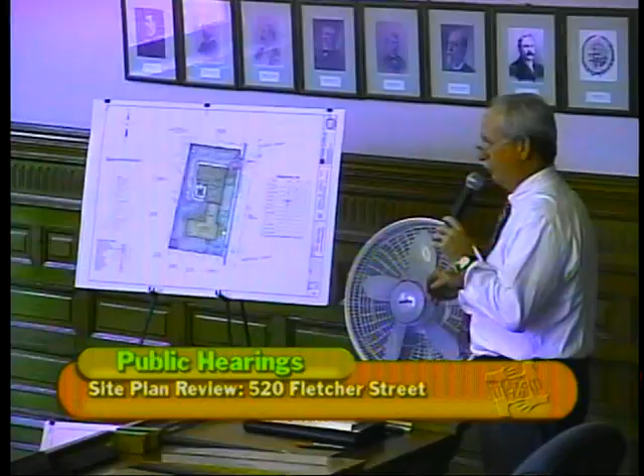Again, we've been through the pre-application hearing. I know you have a busy agenda. Maybe I could skip through the existing conditions on this particular piece of property, if that's okay, and go right to the proposed development. And then from there, what I'd like to do is go briefly over the building and then bring you up to date with respect to a meeting that was held on June 26th with the neighborhood, and go from there. Again, I think everybody's familiar with where the property is located on Fletcher Street, 520.

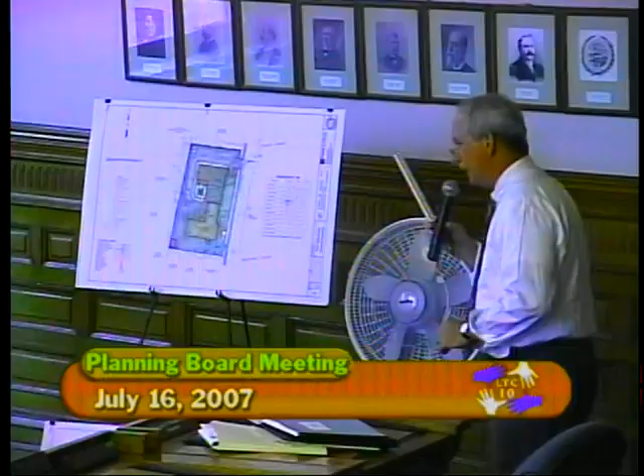There's an existing building on the property of approximately 7,000 square feet, a little more than that. What we're proposing to do is add an additional 20 beds to the existing 27 that are there now. This is a facility that's been in operation since the turn of the century. And as we stated in our application, there is a need out there with this aging population to provide these types of service, specifically in an urban environment and in neighborhoods like this.

What we've done is we've tried to match the mass and scale and texture of the existing building. It's a very unique building, it's a beautiful building. And what we'd like to do is complement that while we're not only responding to the need out there, but also responding to the need to make it fit into the neighborhood properly. What we've come up with basically is a mirror image of the existing building.

The existing building is an L shape. It was added on to some time ago from here back, but they did a nice job with that addition. There's an elevator that's on this end of the building, and what we did was we basically mirrored this, flipped it over. We added another elevator in here and added another entrance over here. When we spoke to you last, we were contemplating a revision to this end of the building with a handicap ramp, and it really did impinge on access back and forth.

So we decided to get rid of that idea, and we're going to put the handicap ramp in the back of the building over here, where we can easily accommodate access this way. So that gets rid of this whole issue with respect to access in here.

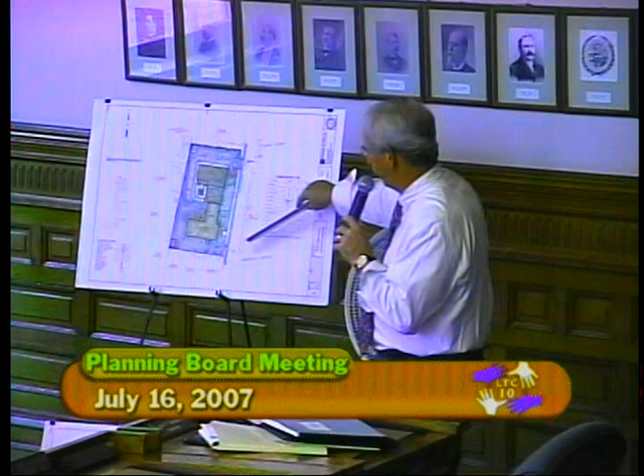Currently, there is one-way traffic in and out of the property, entering here, going around the building. And on the existing conditions plan, you'll be able to see that there's an exit right here. When we put the building on, we encroach into that existing parking lot, and we have to eat up some of that space. That necessitates moving the driveway to the north a little bit, but we can do it in a manner that complies with the zoning bylaws with respect to the number of parking spaces and the offset requirements.

Some of the features here, again, we come in here. We did have a bottleneck at this location with the existing garage, particularly for truck traffic coming and going to the site.

So we're proposing to diminish that, but there's another potential idea I'll bring up in a minute. We do want to do something to get rid of the traffic problem. There would be a small loading area here for someone to come in and unload the supplies needed on a daily basis for putting meals out.

Again, one-way traffic out, angled parking in here. Right now we're proposing the dumpster at this location. We're proposing a handicap parking space, which is also a van parking space, and can also double as an ambulatory pickup and drop-off.

Under the zoning bylaw chart, if you take a look at that quickly, you'll see that we meet all the criteria for zoning. Even though we're diminishing the number of parking spaces from what we have now, we have more parking than we need. And again, just to reiterate, the residents of this facility don't drive. None of them have cars.

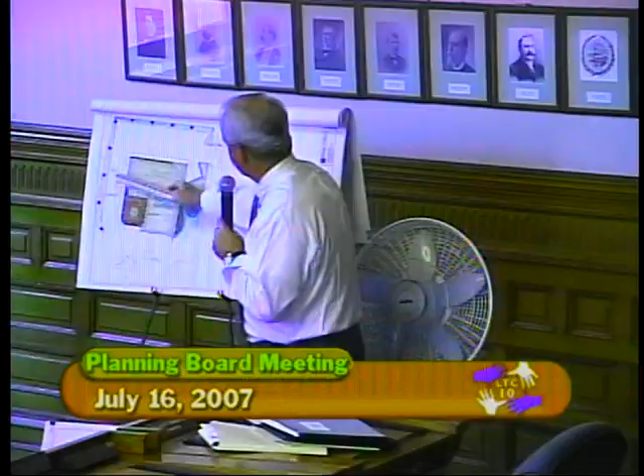As you can see, the setback of this building is consistent with the setback of the existing building, so we still will have a continuous front yard across here. We'll put some landscaping out front. We've got the garden area with flowers and shrubs with a stone wall and a fence. And you can see how this works, people getting in and out with the one-way traffic.

If I could, I'd like to speak briefly about the building.

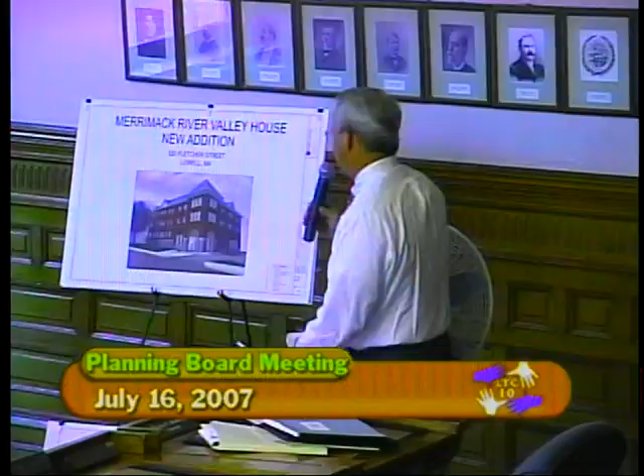This is a rendering similar to the one you saw before. What we attempted to do here is, again, try to match the mass, the size, and the texture of the existing building. We're proposing to continue a water table up here of a stone or stone-like material, which takes the height off of this a little bit scale-wise. And we're making a prominent tower feature right at this location. There's a grade change that we have to accommodate, which this helps to take care of.

As you come into the building, you'll be at one level, then you'll be able to go like a half a level up to the next. The corridors connect all at the same level, so there's no need for anyone to change elevators to get from one level to the other than where the elevators are existing at this end of the building and proposed at this end of the building.

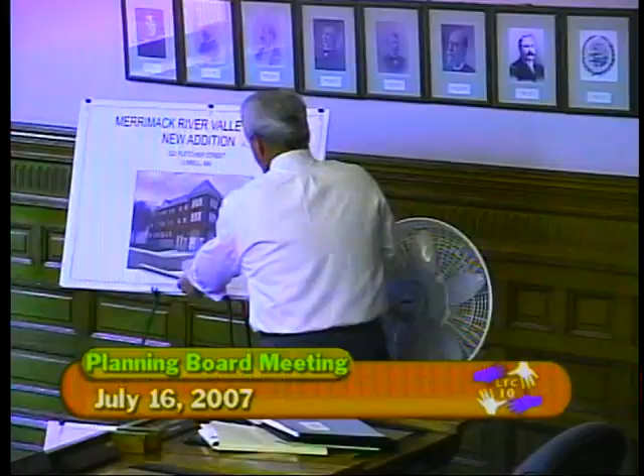The first floor down here will have community room, offices, recreation space, and whatnot. And the floors up above will have the nurses' stations and the rooms. I don't know how much you want me to get into the floor plan of the building, but I think that's been submitted for review in case you want to take a look at that.

This is the corner right here. You come into a lobby, restrooms. Here's a community room that opens up to an outdoor patio with a sunroom over here. And here's the garden area that we talked about. We propose a new elevator right in here that allows you to get from that lobby area up to these elevations and subsequently up to the next floors. The corridor connections are straight through.

The design criteria we had to meet is design criteria put out by the Department of Public Health. We've got a simultaneous and parallel approval process that we have to go through. They're very stringent - one of the criteria they have before we can take it to the next step is that we have to have local planning board approval before we can file our application with them to go to the next step for their approval.

And these are just the rooms above. I think the thing we want to point out is that this new section will have the ability to accommodate male and female residents. So, for example, if we've got an elderly married couple that want to stay together, that will now be something that they can do.

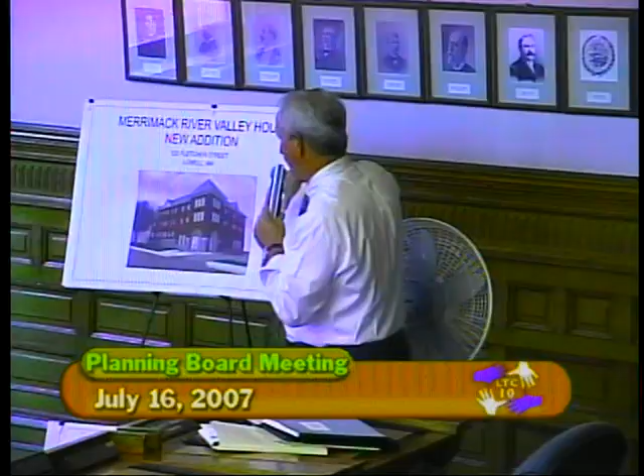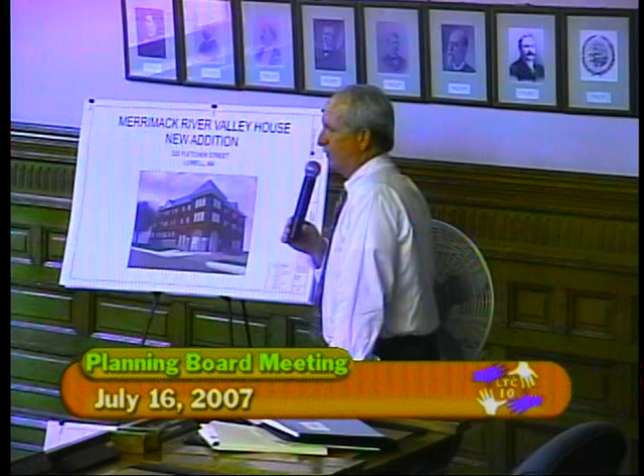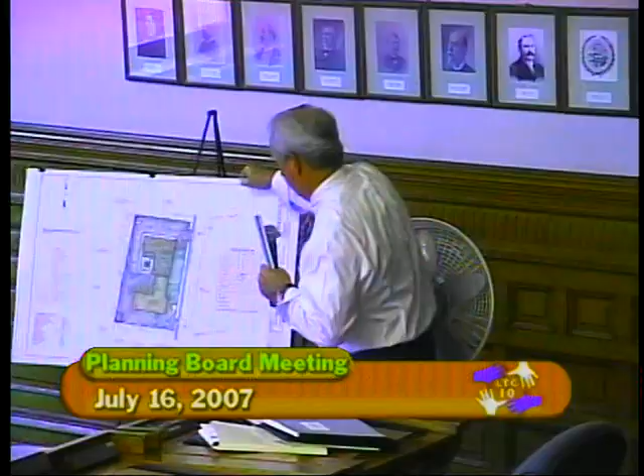Currently, the dumpster is located right here. The neighbors suggested that we relocate it to this location, which I believe we don't have any issues with. We'd have to work that detail out because we still want a place to put outside yard equipment, mowers and things of that nature. So this might end up, rather than just modifying this garage, just getting rid of it. We're not sure yet, but it's not a bad little building, and we'd like to keep some of it if we could. The next thing the neighbors brought up that they wanted us to bring to your attention is the lighting.

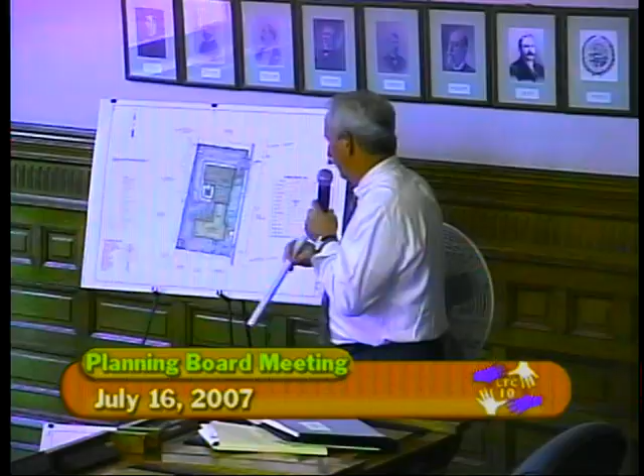Right now, the lights are not cut-off lights. They have a tendency to disperse the light all over the place. So what we could do is keep the poles and change the lamps to full cut-off lamps that would just get the light to shine downward. Those are really the only two substantive things that came out that we're proposing tonight. They may bring up other issues that may or may not relate specifically to this site, but those are the two we think we can work on and accomplish.

Other than that, Mr. Chairman, that's all I have right now. Thank you, Mr. Foley. Mr. Foley, does anybody else on behalf of the applicant want to speak before I turn it over to the public?

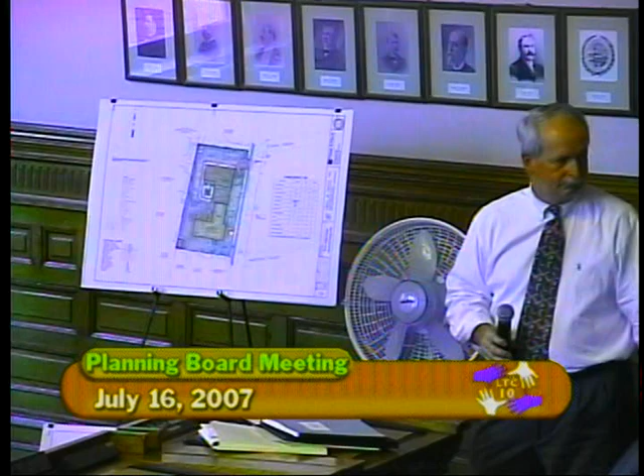No? Okay. Hearing that at this point in time, anybody here like to speak in favor of this proposal? Anyone here in favor? In favor? Hearing none, that portion of the public hearing is closed. Anybody like to speak in opposition?

Good evening. My name's Susan Hardy. I live on Mount Washington Street. I don't not disagree with the expansion. I do have concerns about parking and green space. All I see around that whole building on the back and sides is nothing but parking, tar. There's only a little bit of green in the front. I don't understand how some days you have 15 cars parked there. You're doubling your occupancy. That only leaves 7 people that may be able to come and visit. Our neighborhood cannot take that overflow. We just can't afford it.

Thank you. Thank you. Anybody else like to speak in opposition? Anybody else in opposition? I was handed a letter from one of the neighbors. I will just read this letter into the record.

Dated July 16th, 2007, to Lowell Planning Board, Mr. Thomas Linehan, Chairman. We, Robert and Judith Garthia of 33 Mount Washington Street, Lowell, have some concerns and reservations with the proposed expansion of the River Valley House at 520 Fletcher Street, Lowell. While they have always been good neighbors and maintained their property well, this nearly doubles the size of the facility, which causes us some concern. One, it is one of the few properties in this area with any noticeable green space. Because of this expansion, the green space will disappear. Two, there is currently sufficient off-street parking on their site. However, with this expansion, they will have more employees, more residents, more visitors, and less parking. Fletcher Street, as you know, is a major artery, and on-street parking would be a major inconvenience. It is also a hazard for all traffic. The side streets in this area are already overcrowded with parked cars and are ill-equipped to handle any additional cars.

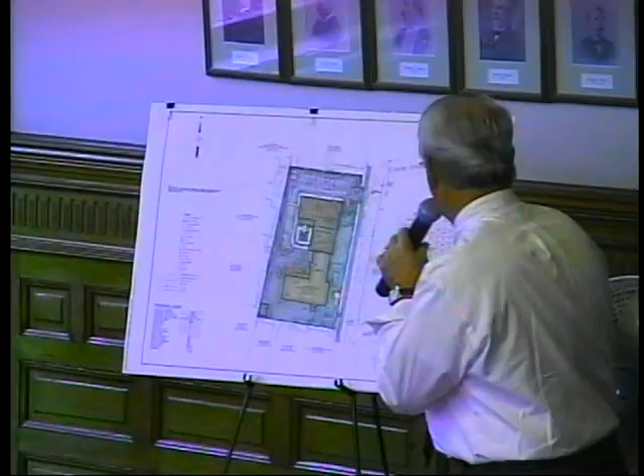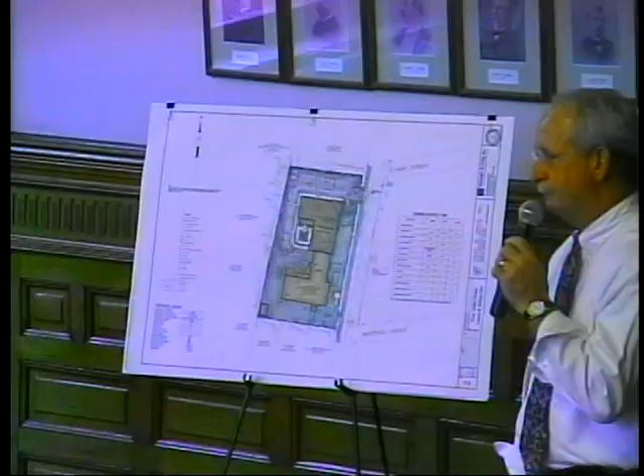Right. No, actually, we didn't have 28 before. Existing is now. Before we added this on, all we had was the parking back here, so we had 1, 2, 3, 4, 5, 6, 7, 8. And maybe, I think they were parking a couple cars over here. So I think before they put this parking lot over here, they had something like 12 parking spots. And it seemed to be working for them, and it's just that they had this piece of land over here, and if I'm not mistaken, they got some grant money to expand that, so they did. Okay, I would just encourage you, there's never enough, you know that, to try to maximize your plan in terms of parking.

That's all I have, Mr. Chairman. Thank you. Mr. Gentleman, you have any questions, concerns? Thank you, Mr. Chairman. So I just had one question with regard to the parking, and George, maybe you can answer this for me. What section of the parking table governs a facility like this, what's the zoning requirement? George, over there? I think we did this under institutional use, per bed, I believe. So many spaces per bed for a hospital-type institutional use, if I'm not mistaken. 1 space per 3 beds plus 1 space per emergency care bed.

So it does concern me, as Mr. Lockhart pointed out, as much as you say you're the only one in the lot - where do the employees park if you're the only one there? Actually, the employees park back here. Well, you said there could be 15 employees. I haven't been there to observe them and if they all have cars or not. So do you have 12 to 15 employees now? Yeah, maybe Mr. Hardy can respond to that better than I can.

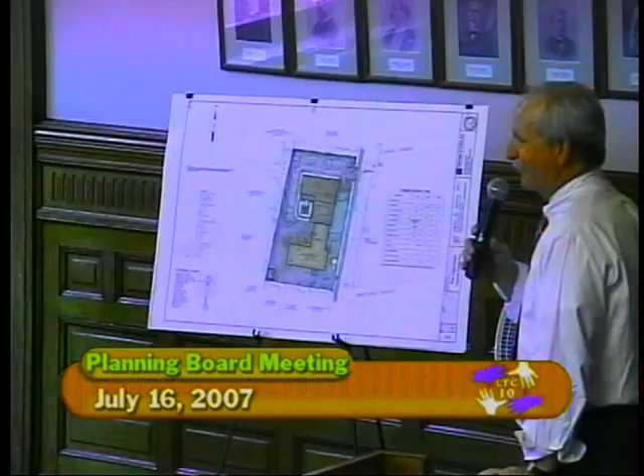Every time we've tried to put these in an area that was aesthetically pleasing, they've trumped that effort. It's just one of those things that bring life and safety into the situation. And it's funny, if you don't look for them, you don't see them. But they're just pretty prominent in most projects.

So you're going to address the dumpster location and the lighting. I think that's the pleasure of the board, we can do that. I think we should make that a condition.

The other question I had is, who does River Valley House support? Is there anybody who applies, can access it, or does it support a specific population? What is the community that it supports in the area, the type of people that go reside there?

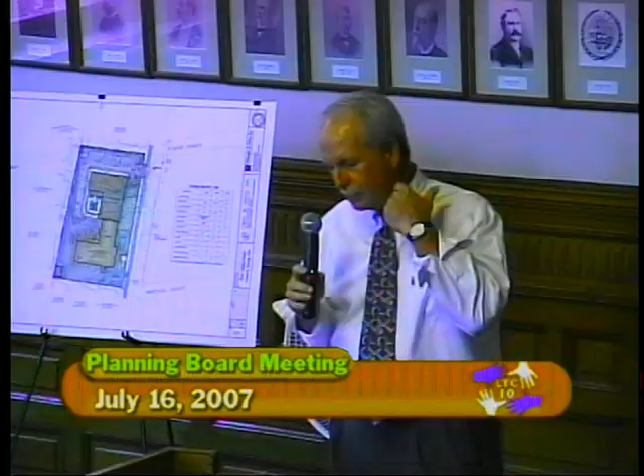Thank you. My name is Harvey Boulay. I'm a consultant to River Valley House. Our average resident age right now on admission is 85 years old. These are people, more than half of whom come either from the city of Lowell itself or lived much of their life in the city of Lowell and are moving back in to join the residential care facility. We provide 24-hour care that provides care for activities of daily living.

These are people who can't live independently and whose families can no longer give them the level of support they require to remain healthy and have a good quality of life. It's not a nursing home. We provide limited health care. We provide housing, meals, health care monitoring, and personal care. And so it occupies an important niche, we think, between independent or assisted living, where you have limited assistance, and nursing home care.

What River Valley House importantly does is help keep people out of nursing homes. One of the main problems in caring for this rapidly aging, increasing population is that many people end up inappropriately in nursing homes because they can't find this nice level of care that provides a modicum of assistance that they need, where they don't need round-the-clock medical intervention or services.

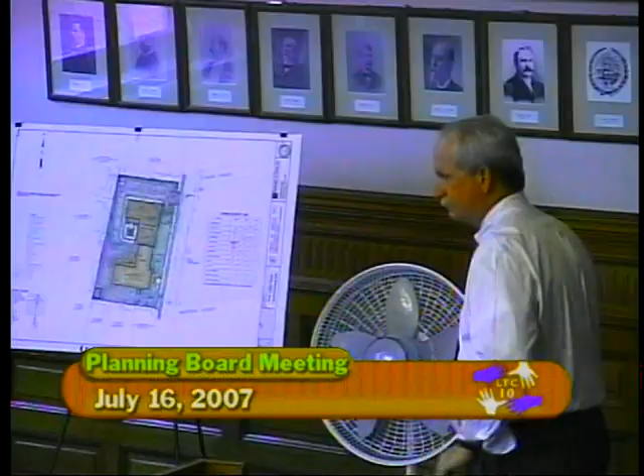First of all, I'd like to compliment the petitioners and Mr. Foley, because I had some issues with the original configuration at the pre-application with the handicap entrance, and I was pleased to hear that you saw that as a concern and moved it to the rear of the building. I think by doing that, we addressed the issues with the parking. I know I was involved with an organization some time ago that did volunteer work there, and we were able to actually park cars along the side in front of that garage, so I think there's an opportunity to get some spots there.

I have to ask the question regarding that box in the front of the building. From your experience, what do you think we could get away with for screening on that?

I think we can perhaps put some shrubs around the side and back, but not in the front. Yeah, they won't permit that. Actually, it doesn't show on this drawing, but if we put it right here, we could show shrubs around the side and the back. How many feet is that from the sidewalk as well?

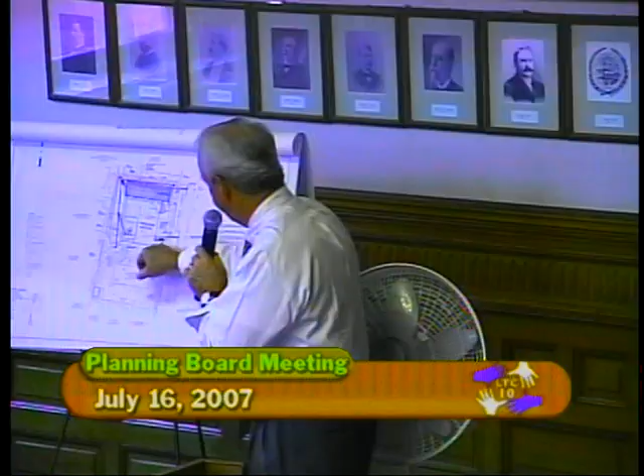That's close, approximately 15 feet from the sidewalk. And that's going to be approximately 5 feet high? Yeah, they have different types. They kind of dictate to us which ones they prefer, given the loads that are going to be used, the capacity.

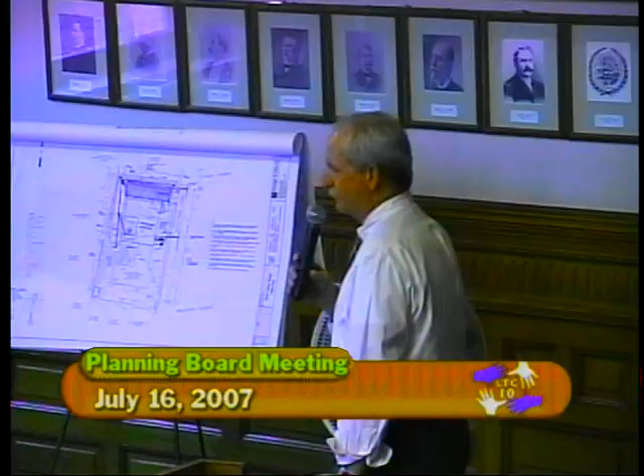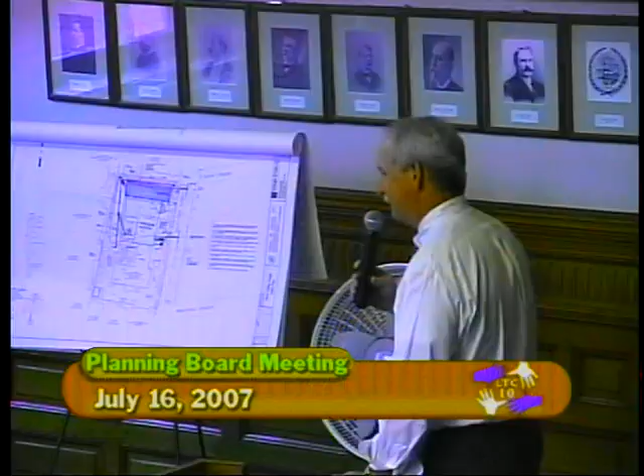We certainly would want to try to maximize the screening around that because it is so prominent in front of that building. If you go by Lowell Catholic, it's right there in the front. You go by the thing Nick Saris did down here, the senior center down there at CVS, it's right there in the front. We've tried it numerous times, but it's tough to get that waived.

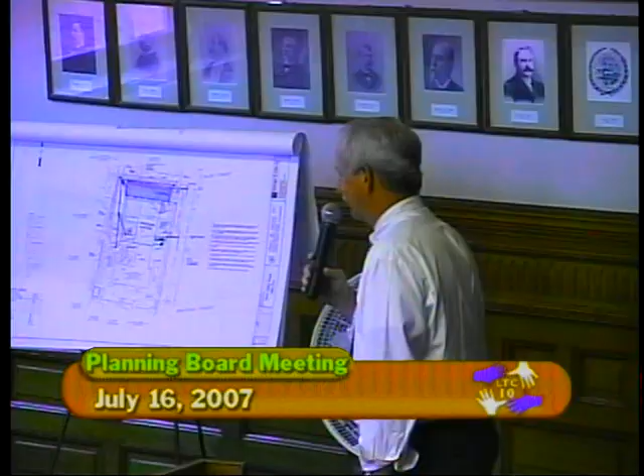Well, I'm certainly pleased with the architectural details and the care that you're taking with the addition, in meeting with the neighborhood around there.

The dumpster, I guess, is my concern. I actually went through that site yesterday, and that's tight with the existing garage, making that turn. What you're proposing to chop off, or trying to, how much room is that going to give you? I'm just trying to visualize a dumpster, storage, and maybe some additional parking. I'm trying to get a feel for what that corner could look like.

What we try to do is take off enough so that an emergency vehicle can get through, which is like a centerline radius of 32 feet.

Again, if we put the dumpster over there, there's a pretty good chance that this is going to be diminished so much in size that it's not worth keeping, and we'd be better off just getting a nice shed to put out there next to the dumpster for the lawnmower and stuff. If we're doing that, depending on size, we need 10 by 10 for the dumpster pad, so that'll eat up some space, and the shed doesn't necessarily have to go at this location. We could probably find another spot for that.

There's a chance that even some of that use, because now we've got some space to work with in the back here, currently occupied by... did you see the ramp that was out there? Yes, now I did, the handicap access ramp. That ramp's coming out. And that's going to create, that eats up a lot of square footage.

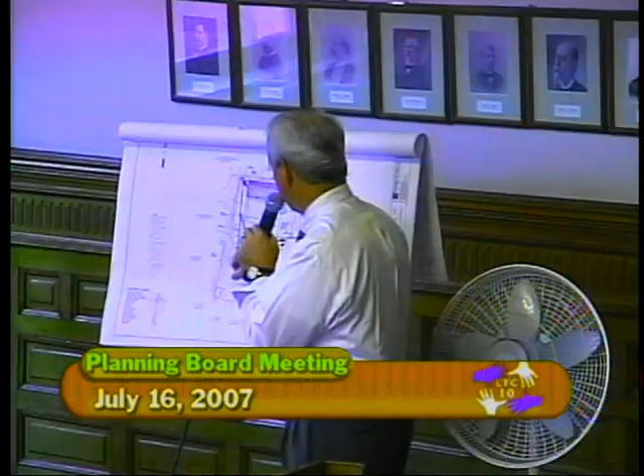So we might be able to do a couple of things here. We might be able to put a shed and grab a couple of parking spots at the same time. And again, it's out of sight, tucked around the corner, so you wouldn't be able to see it from the street.

Okay, Mr. Chairman, that's all. Thank you, Jerry.

Joe, any questions, concerns? Yeah, thank you, Mr. Chairman. I like the project. I applaud you for meeting with the neighbors as well and addressing their concerns. It certainly does provide a necessary service. Just have a question following up on some of what my colleague spoke of concerning the parking.

I understand you have an arrangement with the church for whenever there's a large function where you need additional parking. Are you comfortable enough with that arrangement that if, as a condition of approval, we said there'd be no overflow parking for employees or visitors onto the street, would you be comfortable with that?

Yes. I might say that we have a splendid relationship with the church. In the event of emergency, we have a key to the church where we could transfer our residents to that location. So you can see there's a good relationship there.

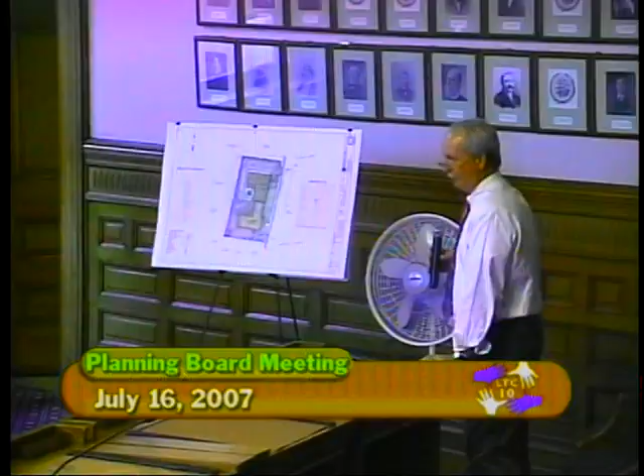I believe that's all I have, Mr. Chairman. Thank you. Thank you. I just have a couple of comments.

As indicated when we came in at the preliminary plan, I do like the building, I think it's a beautiful building. When it came in the first time, to get some feedback from the board, our concerns at that point were your turning radius and the parking.

Looking at your parking arrangements, especially having the parking across the street, I feel that could definitely take away any impact the parking may have. You've indicated you have 20 spaces and a total of 17 employees, 10 people during the day with 2 shifts, so approximately 5 employees per shift, and 7 at night. So even if you increase that with the new proposal and pick up, say, 2 more employees during the day, and if they all brought a car, that would be a total of 7, so that would still leave you 13 additional spaces, as well as the parking across the street from the church.

Under the zoning, I know you meet the required 20 spaces required by code, but I do like the fact, as indicated by the board members, that if you can pick up any additional parking, we always like that. I think, as Jerry brought out, if you could put the shed in the back there and pick up the extra parking there, I think that'd be a good place for employee parking.

Another suggestion would be, if you have to utilize the church parking, it might be a good idea to put the employee parking over there, since they're more mobile and probably not 85 years of age like the residents you're caring for. So if some employees could park over there, that would make it a lot easier and leave a lot more parking for the people who visit the site.

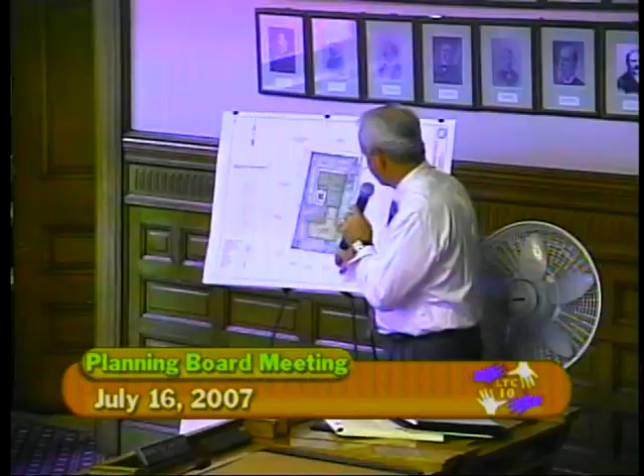We're proposing the new ramp here, and there'll be deliveries coming to and from here. The reason this works well is we can get those front end loaders to come in, pick it up, dump it, and go, instead of trying to turn around the back and process through some of the parking area. But that's the only comments I have.

Thank you. Any further comments with the board? If not, we'll entertain a motion. Chairman, I had one more question—would it be possible to formalize the relationship with the church?

We've done that before, where an applicant wanted to use a neighbor's parking lot, and as part of their application submitted a letter from that organization saying River Valley House has the right to use their parking lot in the event of overflow parking. Can you provide something like that as part of the documentation of this application?

I think what he's requesting is if we could get a letter from the church saying yes, that you have an arrangement with them to give adequate parking in case of overflow. If you have that arrangement, if we could just ask for it, we'll get it back to our file so we know that accessibility is there. Obviously, if they're willing to take your tenants, it'd be nice to see them take your parking as well in case of an emergency.

You have no problem with that? Okay, thank you. Anything else, Mr. Chairman? Any other questions by the board members? I have none. Okay, hearing none, what's the pleasure of the board?

Mr. Chairman, I'll make a motion that we approve this site plan with conditions. The conditions I'll recommend are that the applicant receive fire department approval for the plan, that they modify the lamps to downward-directing lamps, move the dumpster as suggested this evening, provide that there be no overflow parking for either employees or visitors off the site, and document the parking agreement with the church across the street.

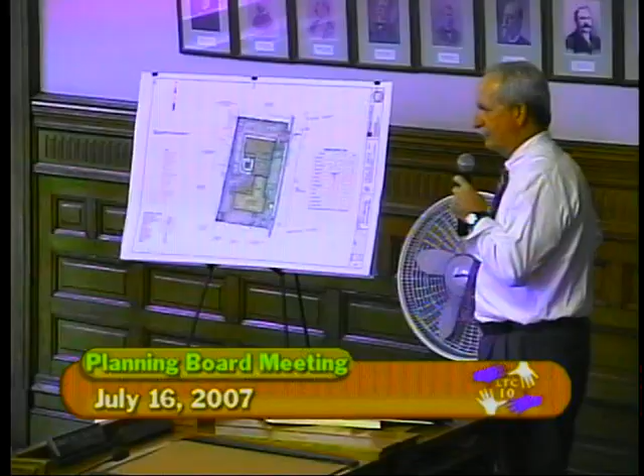You want to add that as one of the conditions? Sure. Yeah, if there's any way we can modify that to meet their requirements that's less obtrusive, you can only do what they let you, so. That's true. Yeah, that's right.

So that covers the screening. George, what was the other one? It was the traffic engineer's request about the way the lines are done in the handicap spaces, and particularly, the engineering office and site plan review would prefer having a condition that inspections would be done, so it's clear to the developers that before the project is built or covered up, they do need to call the engineering office to inspect things.

That was one of the recommendations by the engineer's office. The engineering department did submit that as a recommendation. Do you want to add that? Yeah, I think he indicated they were doing that, but we can add that as a condition, that's fine. Approval for the city engineer request?

Okay, any further discussion? Hearing none, okay. There's been a motion made and seconded with several conditions. All in favor, say aye. Aye. Chair votes yes. This motion carries, 5 in favor, none against. Good luck, thank you very much. Thank you much for your time.

While he's taking down his picture from the design site, just to let you know that the next matter we have on the agenda will be the 612 Dutton Street, Weston Ave, and Fletcher Street.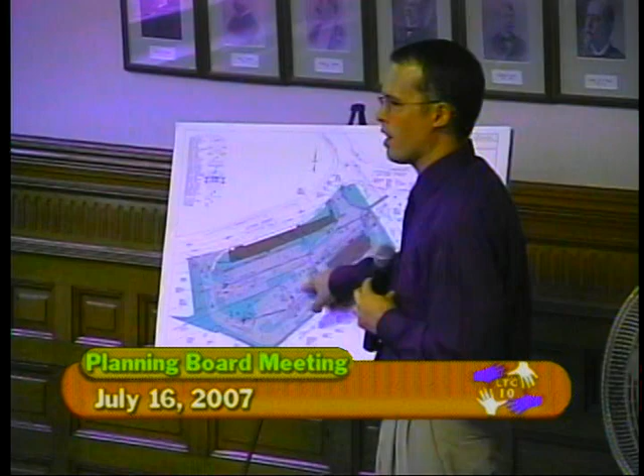Originally this back parking area was closed off. We opened it up and are proposing to put a bar gate and lock across here. This is a better way to bring in the dump truck—when it's coming, you unlock the gate, the dump truck comes in, swings open the gate, pulls in, locks it, pulls straight up to the dumpster, backs up, and comes back out, rather than trying to do some funky turning maneuver to reach the dumpster.

We've also had conversations with Mass Electric about the existing utilities, particularly the electrical lines. We were made aware that we should work around this existing pole in this area, which Mass Electric really does not want altered or touched.

So we shifted the parking a bit to the east, slid it up toward the front of the building, and realigned the exit of the drive-through. The drive-through originally came through at more of an angle; we brought it more parallel and then into an angle coming out, so that we could accommodate Mass Electric and the existing utilities out there.

The utilities proposed for the site—there's existing water, sewer, and drainage that runs directly through the property, so a lot of them will have to be altered as part of the project. One reason is we're altering and paving on top of it, and two, the building is directly placed on top of the existing water and sewer lines.

The existing sewer line in this portion will be abandoned. A new manhole will be added here so we can connect right into the existing sewer line. When this manhole is added, they can pump around to maintain the actual sewer flow while they construct a new line, which will run from the new manhole to the existing manhole within the right-of-way of Fletcher Street.

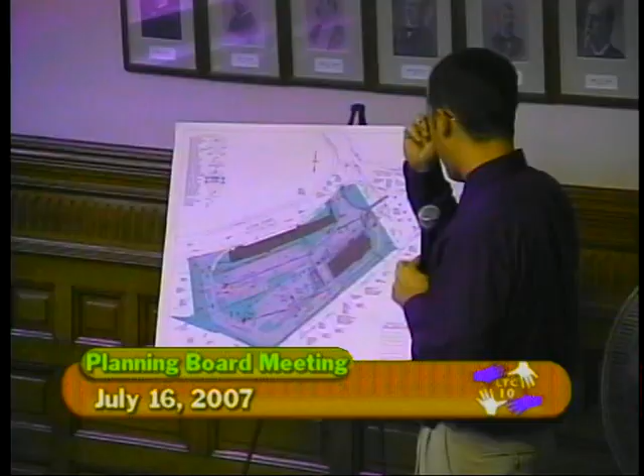The second point is about providing pedestrian access to the site. There are several existing sidewalks that run along the site, and we are providing 3 or 4 different connections to the existing sidewalks. We're proposing a new sidewalk here, which will connect into the existing sidewalk along Dutton Street that runs into the front of the building.

Again, that existing sidewalk will also have connections at the front entrance here, as well as we're proposing to build a new sidewalk from the corner where the drive-through, the speed bump, and the crosswalk are, out to Fletcher Street, so that anybody coming from this way on Fletcher Street can cut through and come into the site and into the Dunkin' Donuts rather than coming out and around and having to worry about the drive-through traffic.

They can cut across where the stop signs, the speed bump, and the crosswalk are, and this sidewalk can be maintained and kept clear during the wintertime and during any other inclement weather by the applicant and the owner of the property.

Comment number 3 is the board may wish to consider the traffic engineer's comments specifically regarding upgrades to the loop detector and the pavement for Thorndike Street's inbound left turn lane green arrow. A relatively minor upgrade will improve traffic flow at this intersection along Thorndike Street, providing easier access to the Dunkin' Donuts site. Again, I have spoken with the applicant, and he has agreed to work with the city on improving that loop detector so that it is functioning properly.

Number 4, the board may wish to consider the city engineer's comments, which include the need for easements associated with the relocated sewer and water mains. Further, Dutton Ave, which provides access to the southern portion of the site, is still a public street and should be kept to city standards.

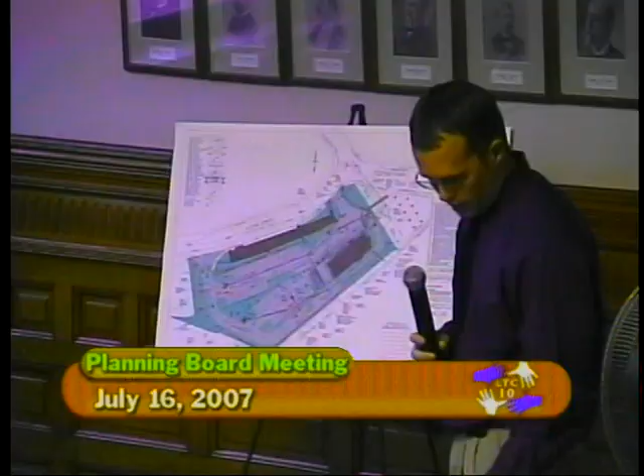The second comment is that Dutton Ave, which is still a public street, should be kept to city standards. This is the short section of what's left of Dutton Ave - I understand it's still the shortest street in the city.

The applicant has agreed to leave what's in the city layout the way it currently is, but we believe that adjusting and narrowing the entrance can provide better traffic flow in and out of the site and improve safety. You're narrowing it down to 24 feet, which is 2 lanes, rather than almost 40 feet wide, which it currently is. With the traffic flow you'll be having with the Dunkin' Donuts there rather than the car wash, it helps to redefine and narrow your traffic patterns, especially at the ins and outs where you'll be having truck traffic.

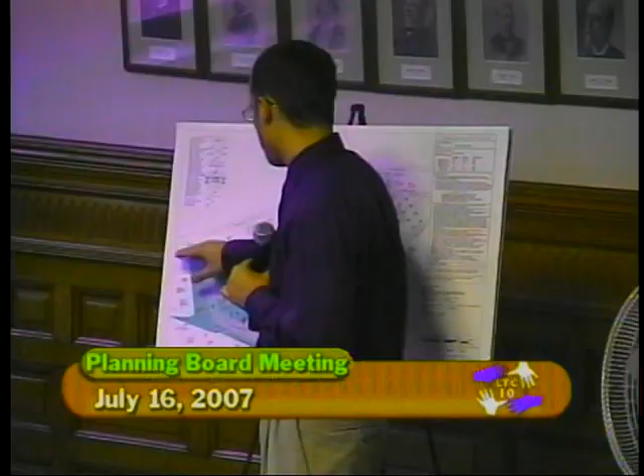It's also my understanding that the owner of the adjacent property has a fenced gate that he uses to access his property. If this is left as proposed on the plan, we can provide an entrance off of here for his use only so he can still access the gate. But if it is the board's desire to keep Dutton Ave the way it is, the applicant is willing to work around that and modify the entrance so it works with the existing conditions on site.

Comment number 5: the city's health department and wastewater department are curious how the grease from the bakery will be disposed of from the site. They urge the applicant to work with the health department on designing the requirements for the grease trap, as well as how you're going to remove the grease and anything else from the site. We have spoken with the health department and agreed to work with them during construction to make sure it's designed and constructed to their needs. As I mentioned earlier, it's not a large flow coming into the grease trap.

It's only something that needs to be emptied 2 to 3 times a year. It's not a large kitchen area that you'd have to empty once a week or a couple times a month - it's relatively small.

Comment number 6: the plans note the removal of old railroad tracks from the parking area. DPD is wondering if the applicant has proper permission, and they urge additional research to ensure compliance with all processes during construction. Mr. Eliade spoke on that earlier and provided the board with written information regarding permission for the removal of the railroad tracks, except for the portion that still remains within Dutton Ave.

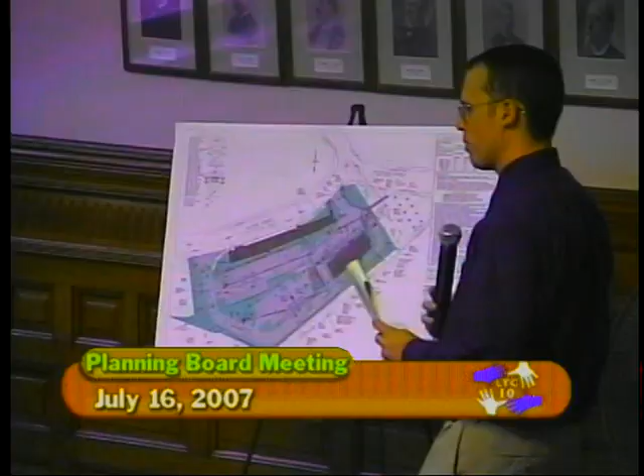The next set of comments is from the transportation engineer. First, curb ramps shall have detectable warnings according to ADA standards. That note has been added in the revised plans. It's simply a pad with raised bumps generally added at the end of the ramp prior to the crosswalk, so that it's detectable by someone with a cane, or you can feel it with the bottom of your foot.

The second comment was about upgrading the loop signal at the intersection, which we went over previously. Conservation has noted that the project is on the agenda for July 18th.

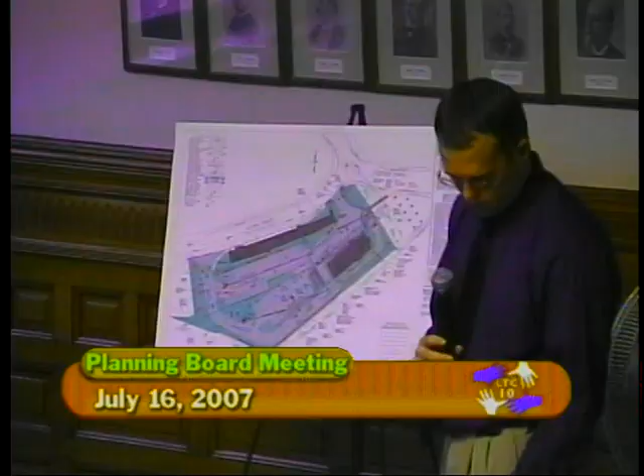Comments from the engineering department: his first comment is on sheet 2 of 5. The new drainage plan shows a pipe entering the canal wall. Permission is needed to enter the canal wall first, or this plan is no good.

As I mentioned earlier, the drainage has been revised. Originally, the line came out and punched through the canal wall. We have since done additional topo and located the existing walls in this area. There's a break in the existing retaining wall along the canal, which part of the site currently drains out through and directly into the canal. That's what we're going to utilize for the outfall.

We'll have a single outfall with a flared end and a riprap section that will help slow down the velocity of the water prior to entering the canal. As I mentioned, this still needs approval from the Conservation Commission prior to construction.

Second comment is about the sewer easements, which we went over earlier, and that these easements must be located by a surveyor and recorded by plan, which is something that will be done after approval.

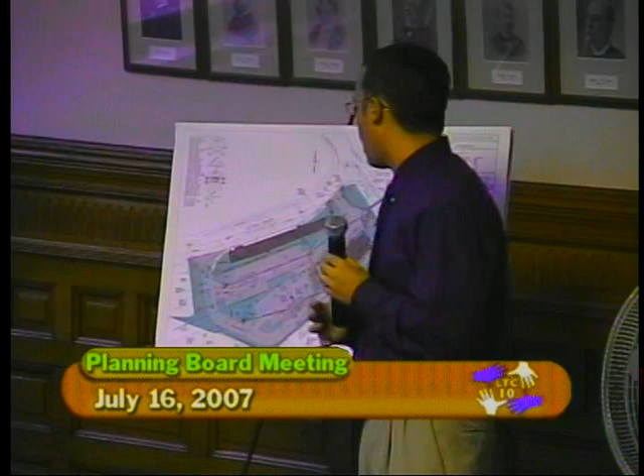Third comment is about Dutton Street, which should remain to city standards in the way that it currently exists. We went over that previously.

Last comment is about the labeling of Western Ave. Originally, the labeling of Western Ave was up in this area. The old Western Ave actually runs straight through here. That label has been corrected and added into that area.

As I mentioned, we spoke with the water department, and we do have an appointment to meet with them tomorrow regarding the construction of the water main, how they want it constructed, what time of year they want it constructed, what monitoring they want, and they also requested that we do some fire flow tests for the fire protection design, which will be required prior to doing the design.

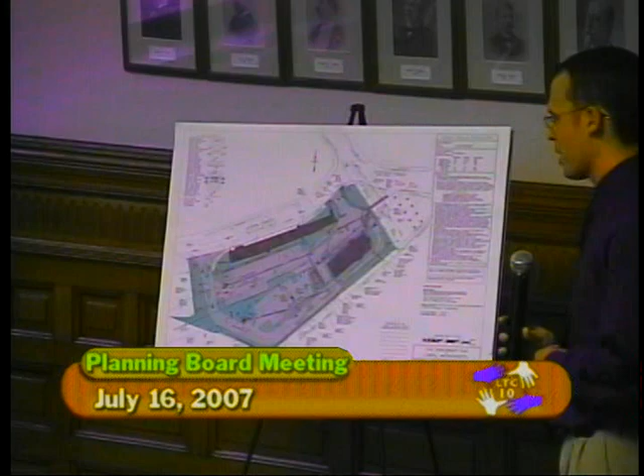There were no comments from wastewater, Board of Health, or any other comments that we received. That is pretty much the basis of the project and where we stand at this point, including comments received by the town. If there are any questions at this point, I'll try to answer them to the best of my ability, and Mr. Eliades and Mr. Marino here as well.

Thank you very much, sir. You're very thorough with the department comments, I appreciate that. Very good. Because usually we bring them up, but by hitting them first, it limits our questions to some of those issues. Thank you. Mr. Eliades, anybody else want to speak on behalf of the applicant before I turn it over to the public? No? Okay, at this point in time I'll turn the matter over to the public.

Anybody here like to speak in favor of this proposal? In favor? Just come to the microphone and state your name and address, please.

My name is Bob McKittrick. I represent my business, McKittrick Industrial Supply at 60 Fletcher Street. Over the past 10 years or so, we've watched the Acre neighborhood improve, starting with the Market Basket, new Stoklosa School, and the renovations through the Adams Street, Suffolk Street area. I think this project is a great asset to the neighborhood. I think we're all looking as property owners to see the neighborhood continue improving. Obviously, some of us have businesses that have finite lives, and we're looking for exit plans for our businesses, and this will do nothing but enhance the values of the neighborhood. I think it's a gateway to the city, especially as you come down the curve on Thorndike Street, it presents a great vista for people coming into the city. I think it's one of the last areas that hasn't been developed, and I think it's just a great project, and I endorse it completely. Thank you.

Anybody else like to speak in favor?

Hi, Don Kelly from Ed Kelly Sheet Metal on Fletcher Street. It appears to me that these gentlemen are very sensitive to the area with this plan. I think it's great. I think it's a plus for the Acre, a plus for Dutton Street and Fletcher Street. I hope you approve it and let them get going on it.

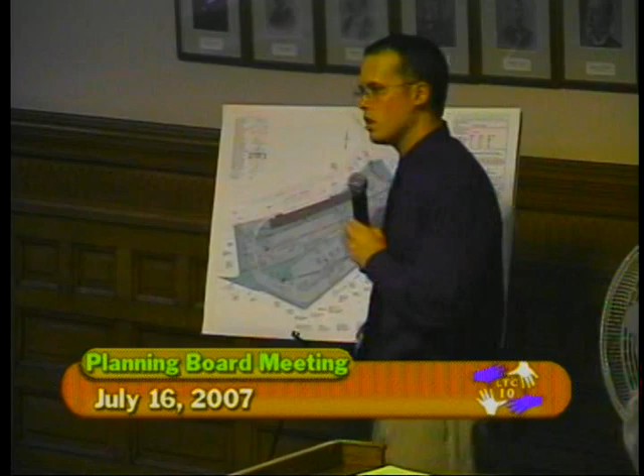So there's not a lot of impact from the traffic. Okay, my other question relates to the total building itself. Now, Dunkin' Donuts is not going to occupy this whole thing? Yes, it is. You're going to occupy the whole building? Oh, all right, I just assumed, looking at it, that it would be divided. Just come to the mic if you could, please, sir.

The reason why that building became a little longer is the historic want of three sides of the building in glass, so it became the sales area where customers would sit, and it became increasingly larger. So the view in front of the building is three-sided. As you're coming down Fletcher or the canal, you'd see glass, and you're going to have a large seating area. That's why everything got pushed back and became that size.

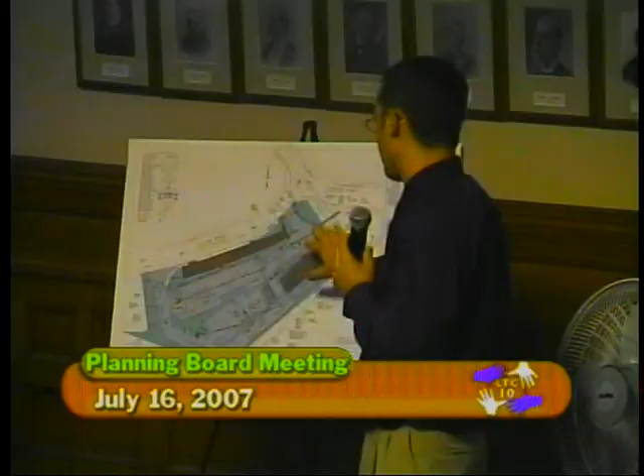Thank you. Yes, George, if you could? Sure. There are a number of arrangements that a city government can use to try to enter into some sort of a memorandum of agreement or something.

Where we would encourage an applicant, if they would like to take over maintenance, even if that just means fertilizing and cutting the grass and making sure something like that is taken care of. It's better usually for their business. It's better for the city. The other thing we can also work with in the same or a similar agreement is making sure that...

You have access rights to be able to construct that sidewalk on the city property that you have in the plan, which I also think is very important, as well as working with us on how we do the crosswalk connections. I do think having that sidewalk that requires cutting across the city property is important.

If you look at the impact of the activity going on around here, take for example the Lowell Sun building and their close distance to this, I would not be surprised if a lot of people working there wouldn't mind dashing out and running over to Dunkin' Donuts and back, and we would like to encourage those people to walk rather than drive between those two driveways to get there. Similar to the activity, as Adam was talking earlier today about the courthouse that's going to be located in the Hamilton Canal District, likely right up on top of the Lord Overpass, not very far from here. That also may generate future walking trips to and from there.

And there's some sidewalk problems, as well as Mr. Zaharoulis was pointing out, some driving problems on the overpass to be addressed. Hopefully the Hamilton Canal charrette process, the design review, and the public participation process will address some of those. But in the early connections, if we can make sure we have the sidewalk connection, we can make sure we have plowed sidewalks and some landscaping cleared and taken care of through there, that will go a long way towards addressing that, and we can work with an applicant on doing that if the board puts that into the approval process in this case. Thank you, Judge.

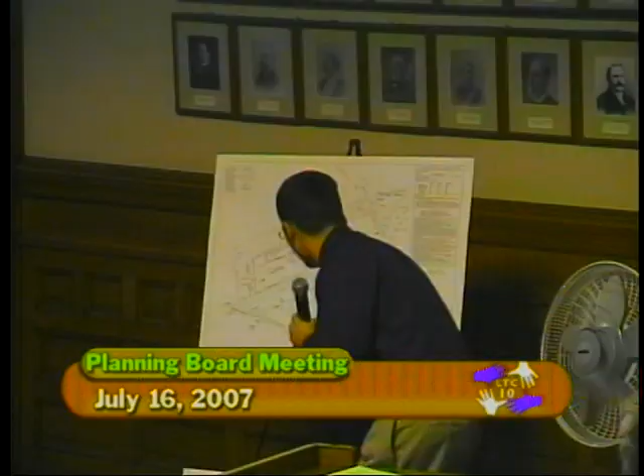Now, can you show me where Western Ave comes in on this property? From the other angle, either. It might be easier to see on the existing. These two lines here denote the old location of Western Ave. If you translate it to the site, it basically comes through like this.

So you're including in that 25-car lineup a portion of what used to be Western Ave, or what is still Western Ave? Correct, a portion of that which was abandoned. And that portion has been abandoned as well? Correct.

Another question, just curious: is it typical to run drainage into the canal? Is that something done as a matter of course? It's allowed if part of the site currently discharges into the canal, which this portion of the site does. The existing drainage on the site has a couple of catch basins left over from the Western Ave layout that pick up the majority of the site, dumping into the combined sewer overflow system.

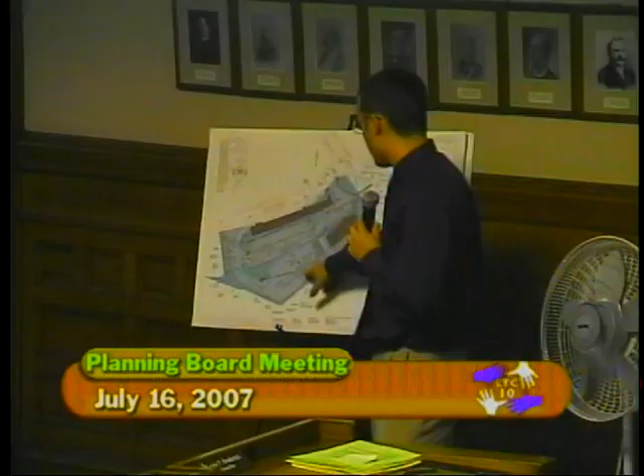With new construction, we're not allowed to tie into that. We have to remove the existing drainage and find a way to discharge it. We did soil testing on the site to determine what was needed for underground infiltration, and with that testing we determined the locations and size of the system. The actual discharge into the canal by drainage calculations is only in the 25-year storm or greater, so the smaller, more frequent storms are not going to discharge into the canal.

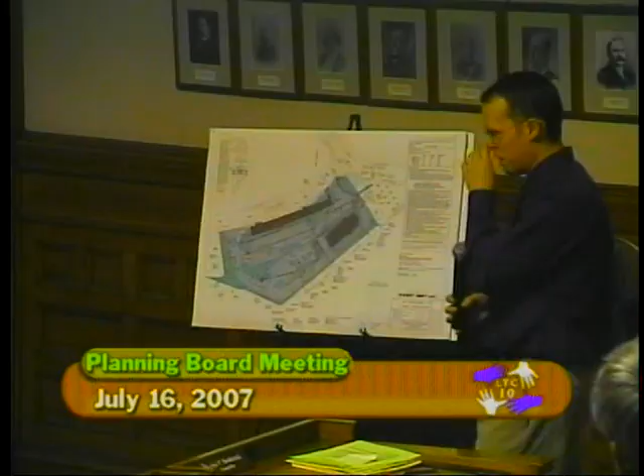I'm sure that'll be covered by the Conservation Commission anyway. My biggest concern is the traffic flow. Nothing changes traffic flow like a Dunkin' Donuts, and I think that'll be good for your business, but thinking about heading down Thorndike Street with the big curve there, it doesn't seem like there's a very big queue for a left turn onto Fletcher Street, which would lead onto Dutton Street. Is that going to be part of the analysis with the light cycle as well? The change asked by the traffic engineer, traffic department, to fix that cycle there, I think is part of what's supposed to solve that problem.

Maybe Mr. Proikis could shed some light on that. The concern addressed by the traffic engineers is for a light quite a ways up in front of the Gallagher Terminal entrance, but that light has a tendency to back traffic up, particularly at 5 o'clock in the evening, all the way around the corner towards the Fletcher Thorndike interchange, because it's not giving enough green light for traffic to exit that area. By speeding up traffic exiting that area, it offers more opportunity for traffic to clear away from the intersection.

On the question about left turn access, one of the things the traffic engineer can look at, and that we regularly do, is if this project or anything else increases the number of vehicles needing to take a left, requiring a longer or more frequent left turn cycle, that's something pretty easy to readjust once we have new traffic counts or base data on the impact. I don't think all that would do is slow traffic leaving downtown coming around that corner, because they'd have a longer red to wait for people to turn left.

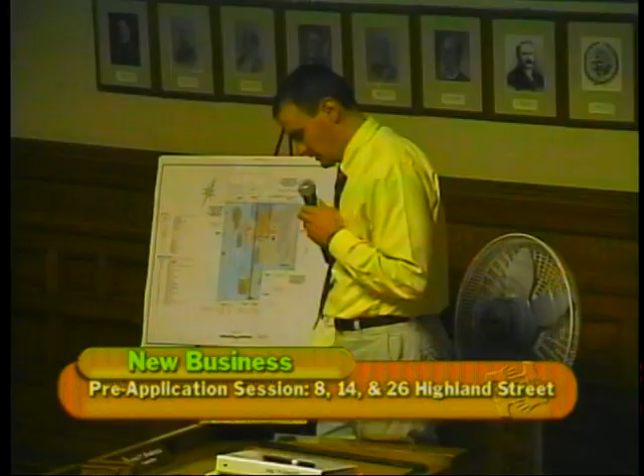The zoning line also runs right down the property here, where we have TMF on this side and UMU on this side. The existing building right now houses all of the funeral home offices and the residence.

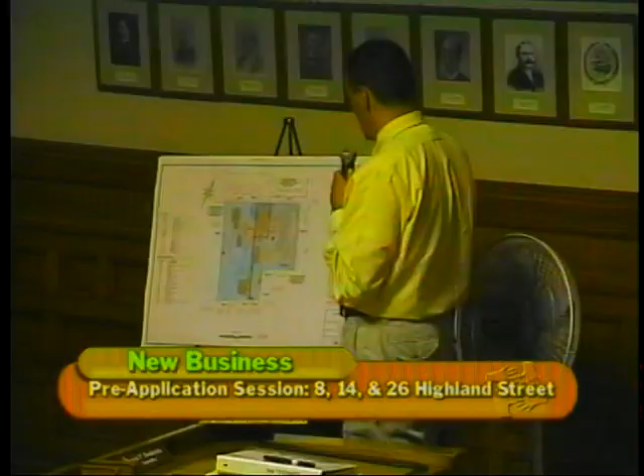What the owners would like to do is separate some of the services that they provide in this one building, and spread out a little bit. So you can see the existing building here, with a proposed addition shown in dark blue, and this is going to be a proposed garage.

There is 1 garage that will be taken down. The property line, as part of this, will be relocated approximately 53 feet in this direction to bring all of the funeral parlor property onto 1 lot, leaving another lot here. All lots will meet the zoning requirements with this plan shown.

As I said, the owners would like to separate the business a little, where they want conference areas and office space. They would have the viewing parlors in this area, and a second floor where they'd add another residence, so there would be 2 residences - 1 on top of the existing building to remain, and 1 here. There's going to be a garage located here, a drive-through completely through, for the convenience of patrons during foul weather.

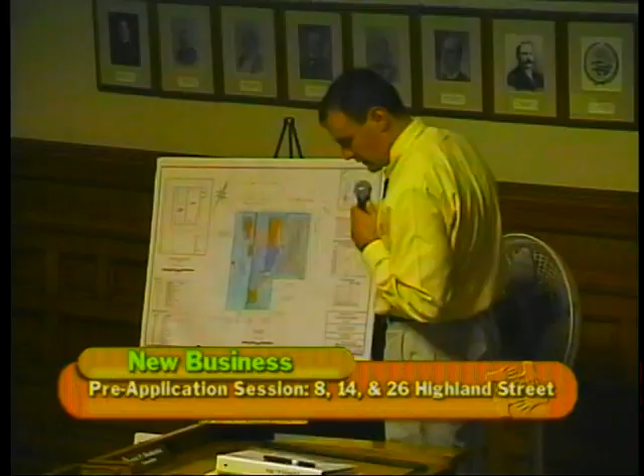Changes to the site include a small increase in the impervious area, since there are already some driveways and a garage. The additional building is going to increase the impervious area a little bit. There will be snow storage in the back and around the lot. All the parking requirements are met.

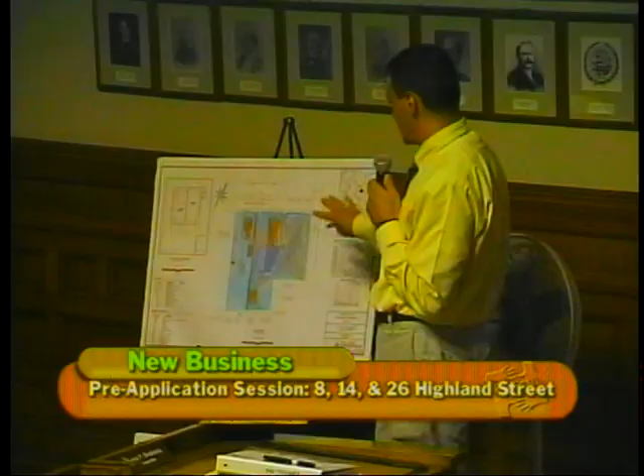We have some preliminary floor plans, and our current floor plan shows it meets all the parking requirements. If there are any changes to the floor plan, we can accommodate a few more spaces, and we don't have any concerns over meeting the parking requirements.

And that's pretty much I have for right now. I'd like just to have some comments from the board about maybe what we should look at for the application.

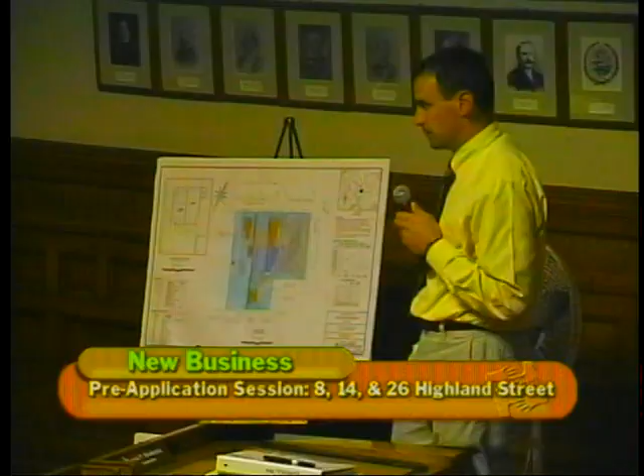Are you creating any more curb cuts onto Highland Street? No, the existing entrance and exit will remain to have a flow of traffic in this direction. This is going to be a carport also for wakes, so they can unload in foul weather. So there's just that one entrance into the back. Entrance, exit. Oh, that's the exit. That's correct, exit there. Okay, entrance. All right, all right.

Okay, I see. What is the square footage on the smaller of the 2 lots here? Do you know? The remaining in the new plan will end up being about 35,000 square feet. 35,000 square feet? The lot, right? The smaller of the 2 lots here? Yes, yes. Oh, that's 35,000 square feet? Yeah, just under an acre.

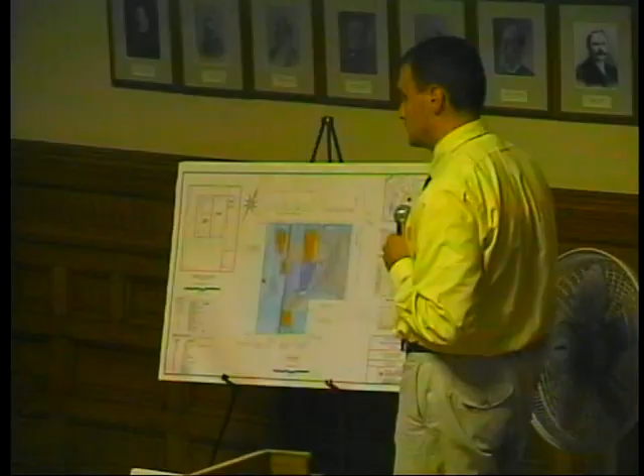Well, we got 100 feet here, and it's 359 going back, so.

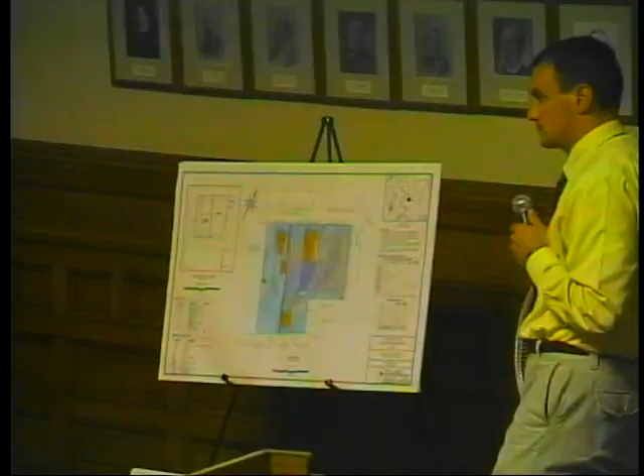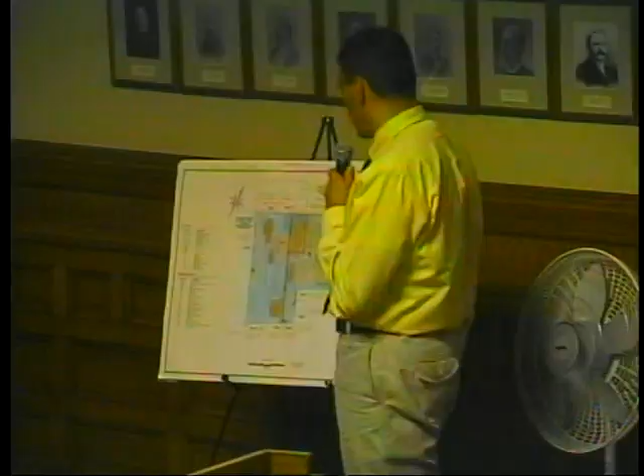And the property here, or the building, these 2 buildings on the bottom here are going to be demolished? Is that right? There are 3 garages currently on the property. This one is within the footprint of the proposed addition, so that one obviously will have to come down. This one will remain and it'll become part of this parcel here, and it'll be used as part of the business here. This one will remain with the residential lot. Oh, okay. I see, yes.

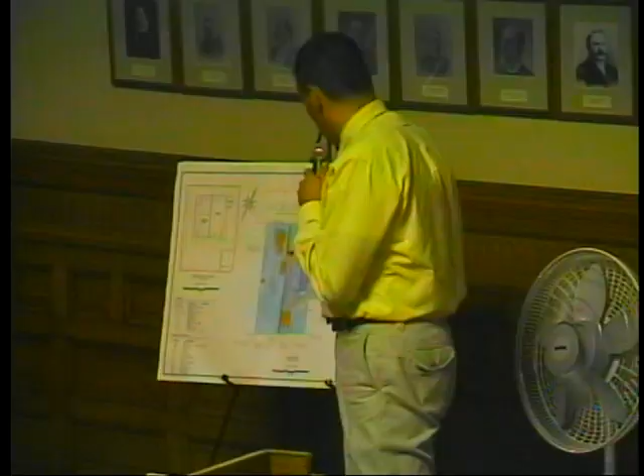And you can see here the proposed relocated lot line. It's got a little jog in it to match the setbacks.

And the traffic, the traffic flow will remain the same? Come in on the one entrance and exit on the other entrance? More or less, if there's specific concern about on-site traffic flow, I'd have to have Mr. McDonough address that, but it appears to be generally the same, one way in, one way out, to come around the building. There's a pass-through, obviously, so that if you don't have to go through the garage. Right.

Steve, I believe the traffic will be the same. I was up there today walking the site with both the McDonoughs, Mr. McDonough and his son, who I met this afternoon about 4 o'clock. Basically, when you come in, the traffic there, it'll go and it'll turn around and come back.

Where they showed here before, can I just see your other plan for a second? Not the blue one. There's a cement, that red piece behind the house. Could you show the part that's going to be torn down? The garage, right there, yeah. Yep. So basically, the traffic comes in, it goes behind that, and comes back up and goes back out to the street. So that there is like an old cement building, which is for parking.

So they're going to knock that down, bring it closer up to the back, to be abutting the existing site that's on there. So all the parking, when you come in, to the left will still be there. The paved driveway that comes down the site goes behind that cement building there now and loops around, comes back up, with all of them maintained the same.

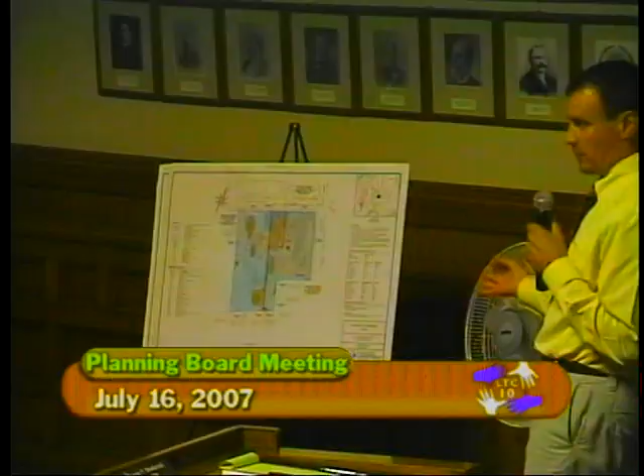So at least now it'll be attached, and he was saying that way they could do office services and one thing and still have services going on. But sometimes now some of the people doing business there are actually seeing the people who are paying their respects, and he wants to separate that to give people a little more privacy.

But he does have a lot of land up there, if you look at it. It's like a football field from the road to the back lot there. Yeah, and then some.

That's why I looked, and I walked all the way behind there on the driveway into the site, and he was explaining to me how all that traffic part was going to stay the same. But like you say, you see it from the street and know it's big, but you don't realize how deep it really goes back. When he indicated how deep it is, I could tell it went back with distance, but I didn't know how long it was. It's way back there. It's a good size - 2 lots combined, it's huge.

Any of the board members? Joe, you have any questions?

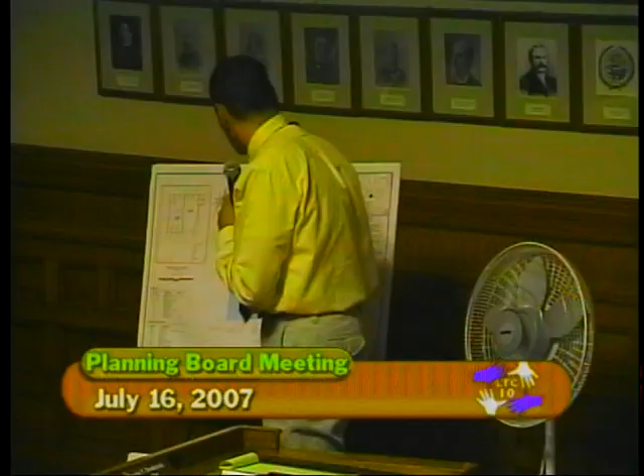Yeah, just briefly, when you move the property line over to where it's going to be, where's the parking for that existing dwelling on the left? There will be parking here beside the building. There is a garage, and there's an area here, so we do have some area in here and the garage. There's a bunch of parking there, that's where I parked today, actually.

And the egress for that existing dwelling then is across the other lot and out, am I correct? That's correct. So is it the intention, if you know, that these lots will always be maintained in common ownership, or some sort of an easement? If that property would be sold off, is it going to be held in common ownership? I don't know if Mr. McDonough can speak to any future plans or any access or egress from the other dwelling.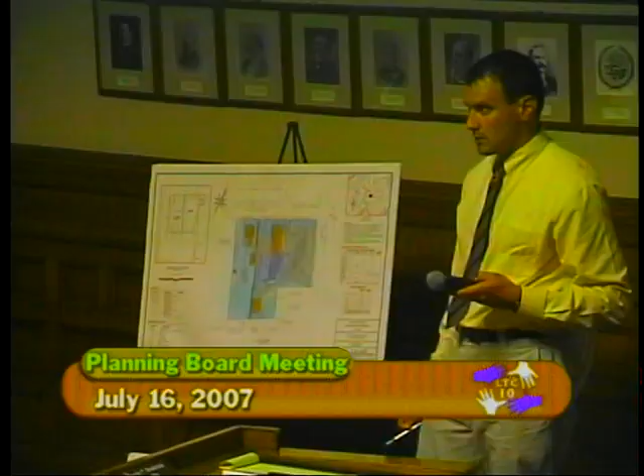Question, Mr. McDonough: basically the egress coming in and going out - if the entities were to change and not be the same ownership, how would you get in and out of the project? The ownership of the property is going to stay the same as long as my sons want to stay in the business with me.

The issue is my son Jack's getting married. So the building to the left, closer to the Keith Academy side - if you look at this site, it would be to the right from the street - I'm living there now with my wife. It's gigantic, and we're going to let my son move in there. I'm going to move over to the new facility that you guys are going to help us build.

Nothing's going to change at all. I don't plan on selling anything, I need all the property that I have. We have the luxury of a swimming pool back there and plenty of room for grandchildren should they decide. So we'd like to live happily ever after right where we are now. No pressure, though.

So as far as my house, which is the one to the left, my wife's got her own parking spot outside. It's labeled the Queen. I noticed down over there today it said the Queen's Parking, it was a big double spot. So there's plenty of room, but if you guys make time to take a walk around up there, I'll be glad to walk around the property, but don't plan on changing anything.

If you ever did sell off that lot separately, which you could, it's certainly big enough to do that, you'd have to give them some sort of an easement to cross the other lot to get out to the street. Or they could petition for a curb cut on the western side of the property and drive out the other side. There's probably 25, 30 feet there between my house and the apartment house next door.